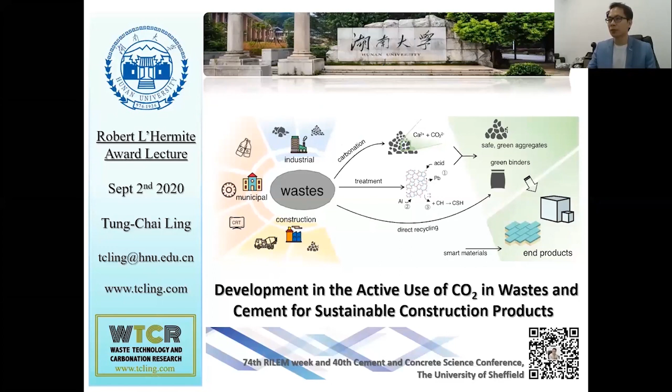This leads to today's presentation topic, on the development in the active use of CO2 in waste and cement for sustainable construction products. A little bit of background: I spent 4 years in Hong Kong and 2 years at the University of Birmingham as a lecturer. Before I joined Hunan University as a professor in 2016, I was working at the Federal Highway, US, focused on recycled glass, particularly concerning the ASR problems.

And what is the sustainability challenge that we are facing today? Concrete is by far the largest material used in the construction industry, and the demand is ever increasing and predicted to increase in the coming decades, because concrete is cheap and environmentally friendly compared to other man-made materials. Due to the huge amount of cement production, it contributes 5 to 8% of global CO2 emissions. So certainly, we have to confront this challenge now and in the future.

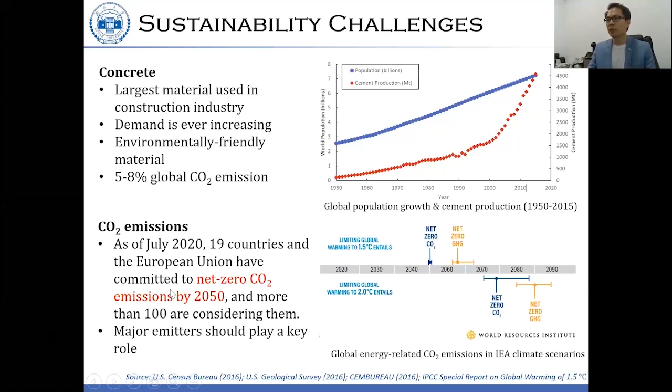In response to this, the European Union and other countries have committed to net zero CO2 emission by around the middle of the century, limiting global warming to 1.5 degrees C. The major emitters like the US, China, or the European Union should play a key role in achieving this target, or else it's very difficult to meet net zero CO2 emission by 2050, regardless of what other countries do.

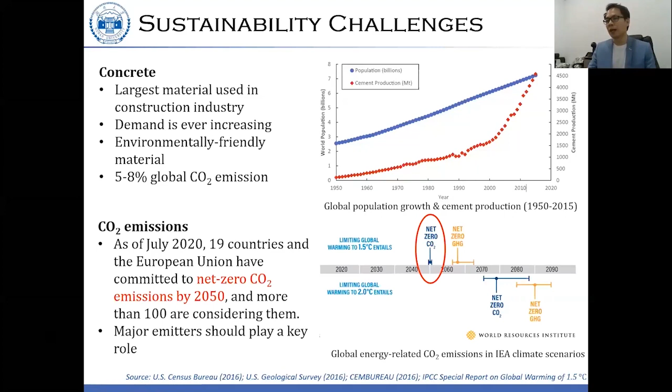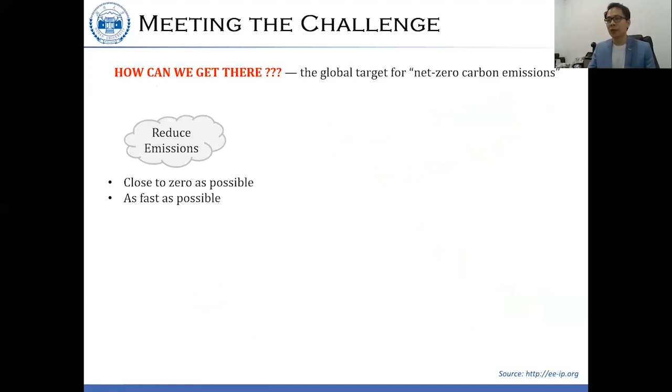So we know that we need to meet the challenge, but the question is, how can we get there? So it requires us to do two things. First is to reduce the emission as close to zero as possible, and it should happen as quickly as possible. Second is to capture the CO2 from the atmosphere as much as possible.

So I take the cement production as an example. So this is a 2050 roadmap introduced by the European Cement Association for the reduction of CO2 in the cement value chain, including the clinker, cement, concrete, construction, and recarbonation, or we call it carbon capture and utilization. So the aim is to reduce the current CO2 emission due to the production of cement down to zero by 2050.

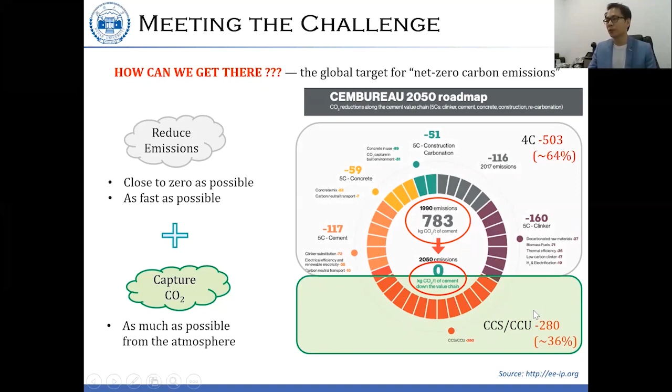So what is the potential for CCU in the construction sector, including concrete or carbonate aggregate? So from the figure, we can see that concrete still remains the biggest market size now and in the future. And also the potential in CCU for concrete is represented by the size of the bubble. In the next 10 years, they can even double the potential. However, if compared to other sectors, for instance, the carbonate aggregate, by 2030 this sector will surpass concrete in potential for CO2 mitigation.

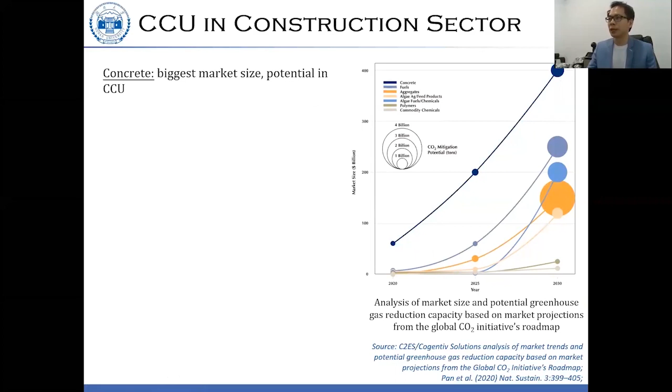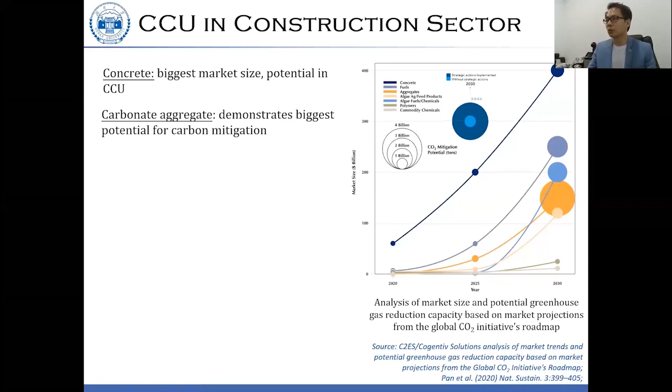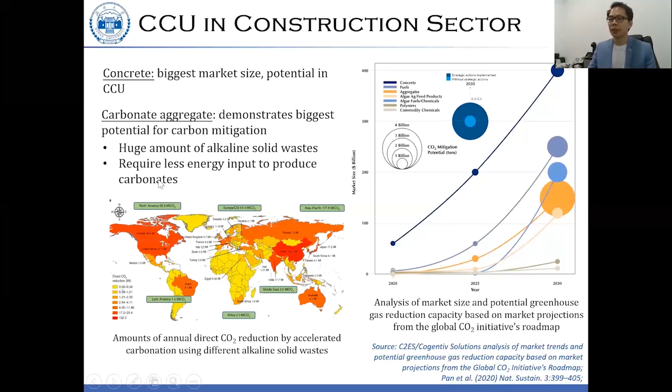So why does the carbonate aggregate show the biggest potential for carbon mitigation? So they actually predicted that if the strategic action is implemented, they have the potential to mitigate 3.6 billion tons of CO2 by 2030. So the key reason is because we have a huge amount of alkaline solid waste across different regions and countries. And this material is a very good medium for CO2 sequestration and can convert into carbonate products. And the whole process requires less energy input.

And a brief overview of what I'm going to look into today. So the role of CO2, or how CO2 can make the concrete life cycle more sustainable. So we know that CO2 is emitted from the cement plant and the amount is huge. And so we can actually utilize the CO2 for curing cement blocks or ready-mix concrete. And during the service life, depending on the type of application, CO2 can actually be reabsorbed back into the concrete, around 5 to 20%. And at the end of the service life, depending on how we recycle and handle the material, it can take out an additional 5 to 10% of CO2 from the atmosphere into this material.

So it is very important that we develop CO2 utilization technology and promote it in the construction industry so that we can make our concrete more sustainable. And apart from reducing the output of waste material, we try to consume the waste and reuse it in new concrete. And also very important is we have to find new alternative materials to conserve some of the natural resources in the construction industry.

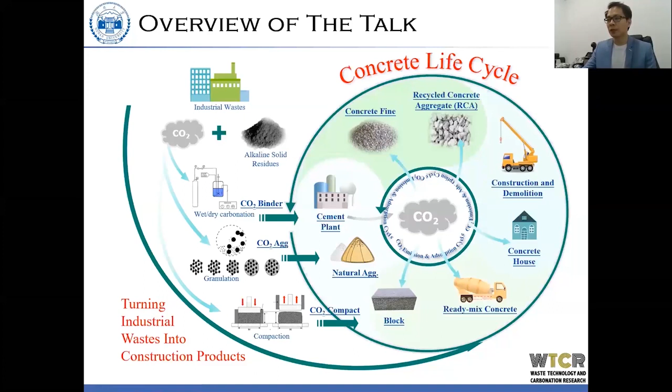So this is my focus for the presentation today: how we can turn the alkaline solid waste coming from different industries, including the mining industry, activated with CO2, into a CO2 active binder to replace some of the cement through the wet and dry carbonation process. And also we can use granulation to turn the product into pellets and use CO2 as a solidification approach to solidify and densify the microstructure. And through compaction or molding pressure, we can make different types of concrete blocks to replace conventional construction products.

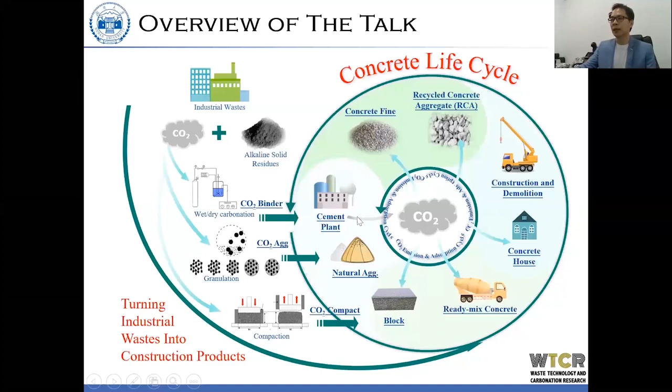So in my following slides, I will focus on these three main parts: the CO2 active binder, CO2 aggregate, and CO2 blocks. But before the end of my presentation, I will touch a bit on the technology developed by CarbonCure for ready-mix concrete, and also Solidia Technologies for a novel cement that is able to absorb a higher amount of CO2.

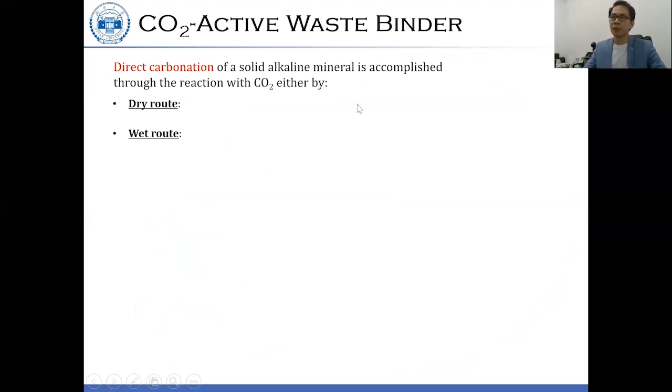So first part, the CO2 active waste binder. So in the construction industry, we know that usually we adopt the direct carbonation approach because it is less complicated and does not involve any extraction or the use of chemical reagents. And direct carbonation can be accomplished through the reaction with CO2, either by the dry route or the wet route. The dry route is more straightforward and favorable for insoluble material. However, the reaction is slightly slower. But for the wet route, they can enhance the reactivity through ion mobilization in the reactions of carbonic acid with alkaline metals.

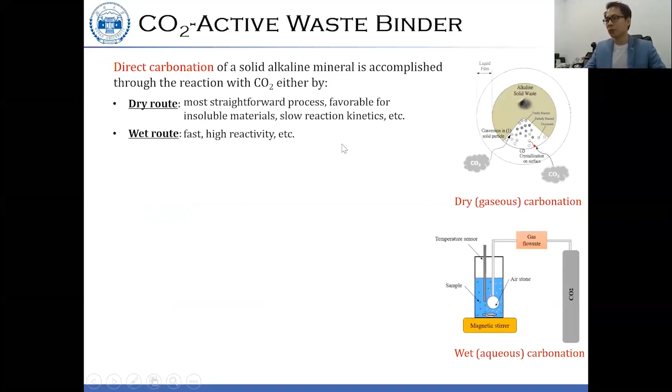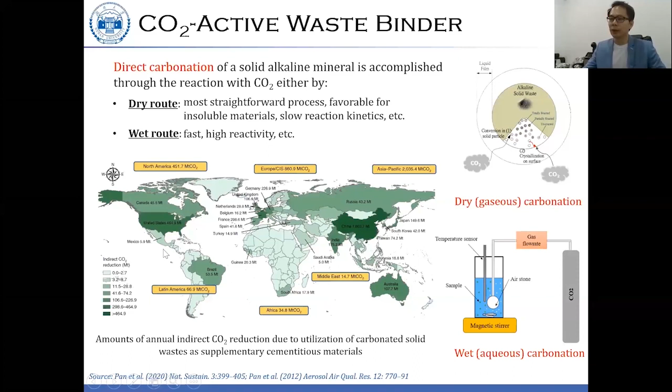In one of the recent studies, we are using concrete slurry waste, CSW, as a CO2 active binder. This waste is generated from the ready-mix concrete plant in the reclaiming process to recover some of the coarse aggregates. After the process, we're able to collect the CSW, and we dry it in our lab, and we found that it contained a certain amount of fine aggregate and unhydrated and hydrated cement particles.

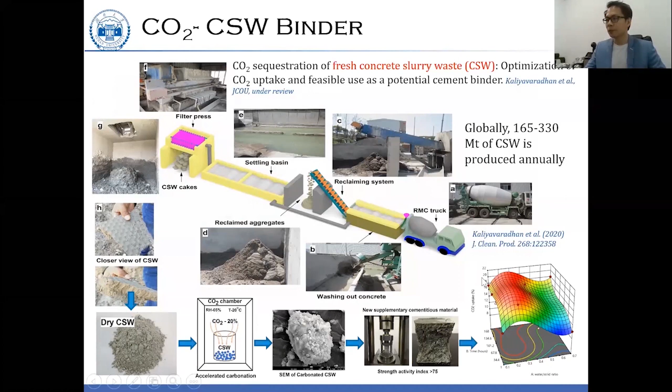So we ran it under the dry carbonation process in the CO2 chamber at RH of 65%, 20 degrees, and CO2 concentration of 20%. We carried out testing for the maximum CO2 uptake by this material, and we found there is a maximum of 20% CO2 uptake at a water to solid ratio around 0.25 at 72 hours of reaction.

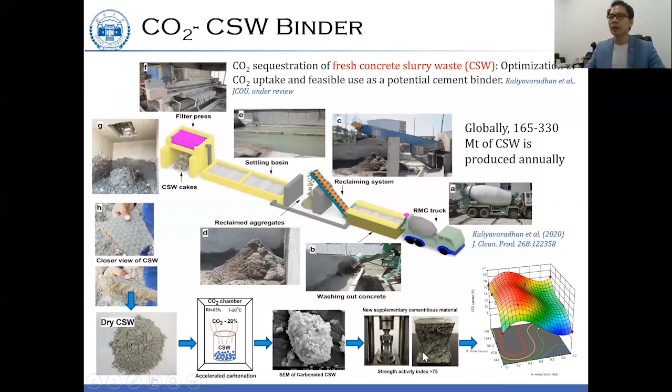So based on the strength activity index, this material could be used as a new supplementary cementitious material in cement and concrete. In another study, we use a hydrated cement powder, often called cement waste powder. It contributes to 30% of the waste concrete, and this material is actually regarded as very low value due to

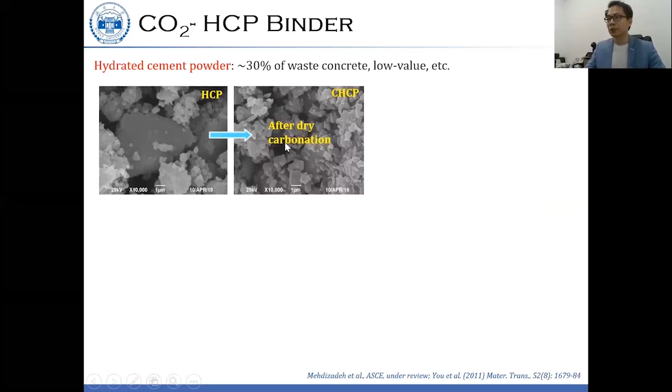the high water absorption. Through the dry carbonation process, we found the formation of calcite around the particles. This in turn significantly increases the specific surface area and also decreases the hydrated bound water. We use the carbonated HCP as a replacement for cement at 15%, and we find a comparable or slightly higher compressive strength at 28 days compared to the Portland cement sample.

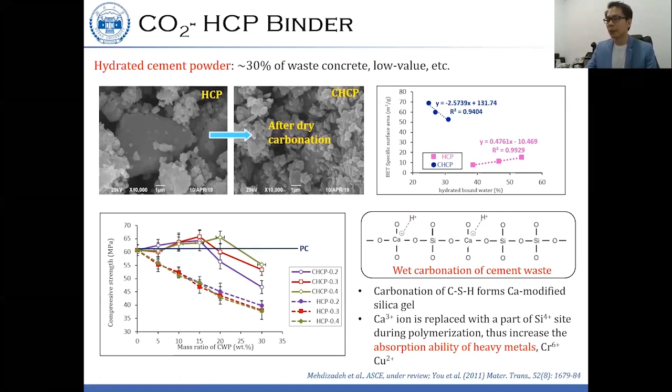A study from a Korean researcher used wet carbonation for cement waste. After the carbonation, the CSH converted to calcium-modified silica gel, in which the calcium ions are replaced with part of the silica during the polymerization. This in turn increases the capability to absorb heavy metals.

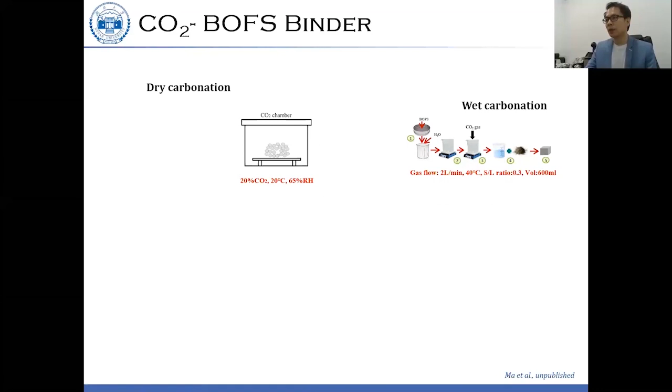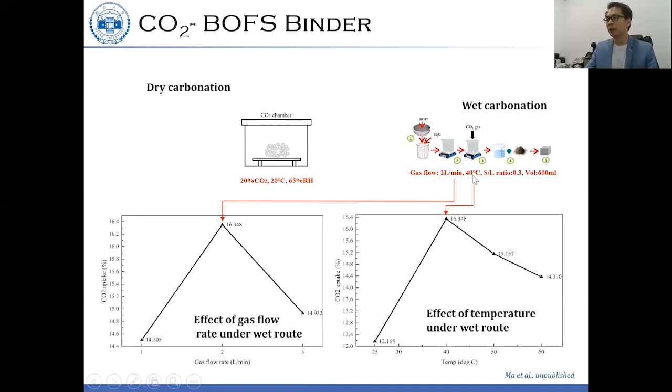We have compared dry carbonation and wet carbonation for the BOFS binder. The dry carbonation parameters are similar to what I mentioned in the previous slide. We also tested the parameters for the carbonation in terms of gas flow, temperature, and the solid to liquid ratio. We found that the optimal values are 2 liters per minute, a temperature of 40, and a solid to liquid ratio of 0.3. We measure the reactivity of the material by measuring the CO2 uptake.

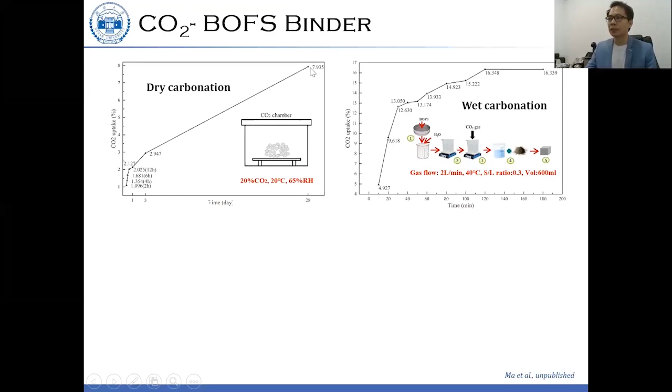As you can see from this figure, under wet carbonation at 20 minutes we can achieve 9.6% CO2 uptake, which is already more than the 7.9 recorded at 28 days under dry carbonation. Therefore, it is very important to know the nature of the material we are using and to fix the purpose of the carbonation route. If we are aiming for a higher amount of CO2 sequestration, wet carbonation could be a very good approach.

It's also very important to understand the efficiency and the rate of the reaction pathway for both dry and wet carbonation. Different conditions have different effects on different waste materials. We also have to determine the maximum limit for inclusion of this active binder in cement

or concrete. They contain some calcite or silica gel, and what important roles do those play in the cement matrix? Whether they could accelerate early hydration, or how they perform in later-age strength development. With the use of alkaline solid waste for carbonation, we are always more concerned about the leaching and absorption of heavy metals.

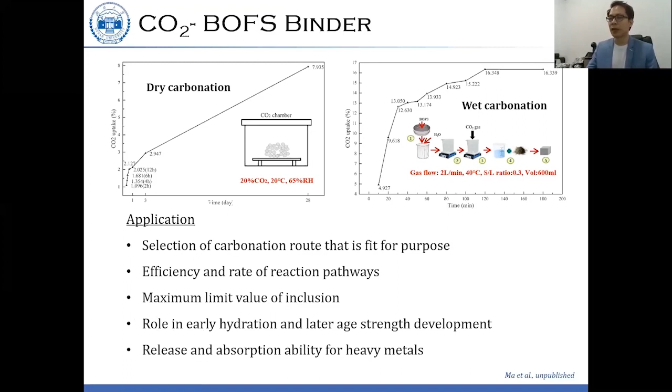So this is the second part of my presentation, CO2 granulated aggregates. Accelerated carbonation technology was already being used in 1999 to manufacture CO2 waste aggregates by Carbon8. We can turn different wastes in powder form into pellets through granulation and pelletization techniques. And through accelerated carbonation, we can activate and stabilize the heavy metals so that we can use them for different applications in construction or other sectors.

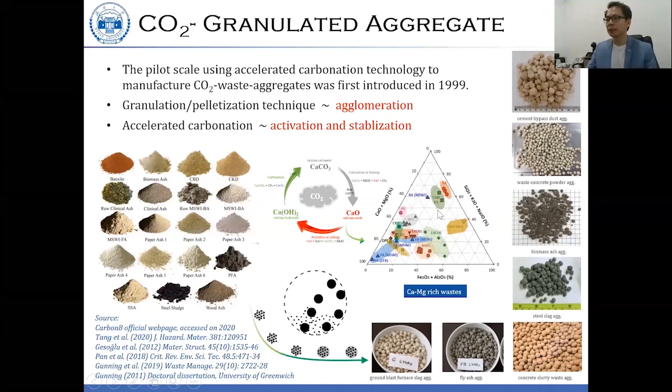So the question that arises is, when is the most appropriate time to inject the CO2, during the granulation or after the granulation? We used BOF slag as a raw material to investigate the impact of CO2 injection during and after granulation.

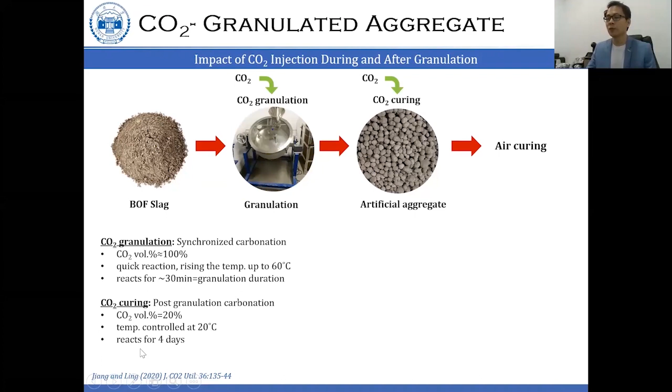So we apply CO2 during the granulation at a concentration of 100% and run the granulation for 30 minutes. After granulation, we also apply CO2 by putting the aggregate in a CO2 chamber, keeping the CO2 concentration at 20%, 20 degrees C, and exposure for 4 days. After that, we further cure under natural air until 28 days for testing.

So we have prepared 3 series of aggregates. AA refers to no carbonation, no CO2 applied during the whole process of aggregate production. AC refers to CO2 applied only after granulation. CC refers to CO2 applied during granulation and after granulation.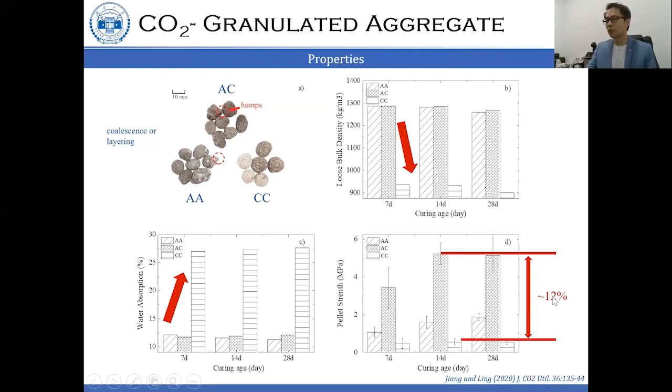However, for the CC aggregate, exposed to CO2 injection during granulation and also after granulation, we found that the strength is significantly reduced, only able to achieve 12% of the strength of AC aggregate.

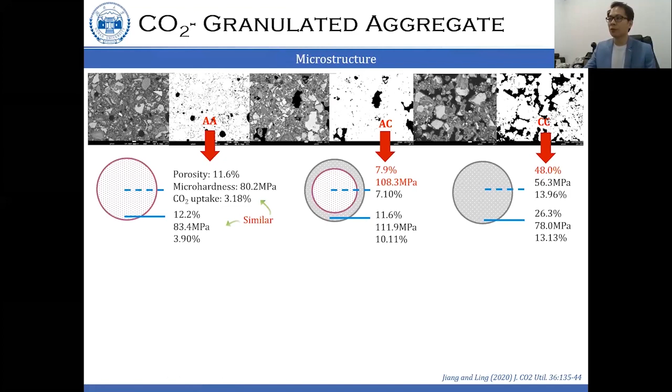So we carried out some microstructure analysis, and based on the BSE image, we can measure the micro hardness, and through image analysis we calculate the porosity and also measure the CO2 uptake. As for the AA aggregate, there is very similar core and shell layer, and the lowest porosity and highest micro hardness value was found for the core layer of AC aggregate. Surprisingly, we also found that the core layer for the CC aggregate has the highest porosity, which also explains why we have very low strength for the CC aggregate pellet.

So the key reason is that during granulation, we apply 100% concentration of CO2, and we are also using a very reactive material, BOFS, for the production process. So the aggressive carbonation reaction takes place and releases extensive heat, bridging water to create the pores. However, this situation might not be similar if we are using a low CO2 reactive material instead of BOFS slag.

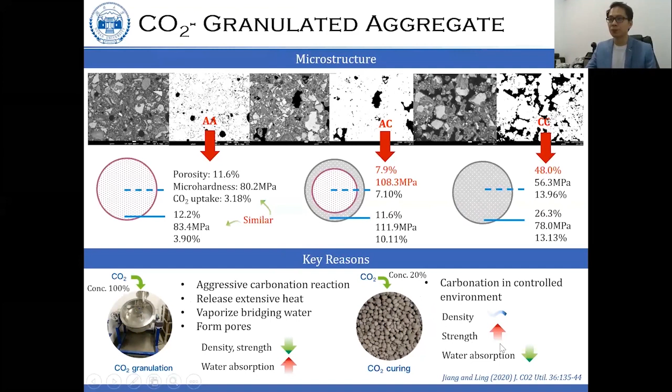And for CO2 applied after granulation, or CO2 curing, it is very beneficial for strength development, and we can reduce the water absorption. We're also using the granulation process to incorporate some smart material, for example phase change material for latent heat storage.

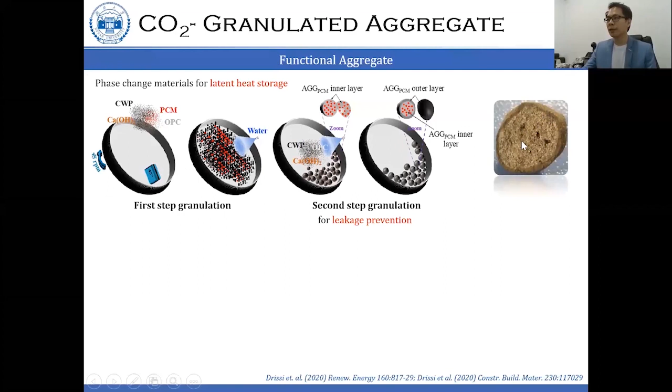So we apply PCM with other raw material during the first step of granulation. The second step of granulation, the main purpose is to make a shell layer to protect against leakage of the PCM. So we have this aggregate, and we can see they have a clear, obvious difference between the core and shell layers. We've done the leakage test, and the result is promising.

Also, we have carried out thermal properties testing by incorporating the PCM aggregate in a concrete panel and exposing it to indoor and outdoor conditions. We found that we recorded 1 degree C lower for the PCM aggregate panel, reflecting that they have better thermal performance and also potential for energy saving.

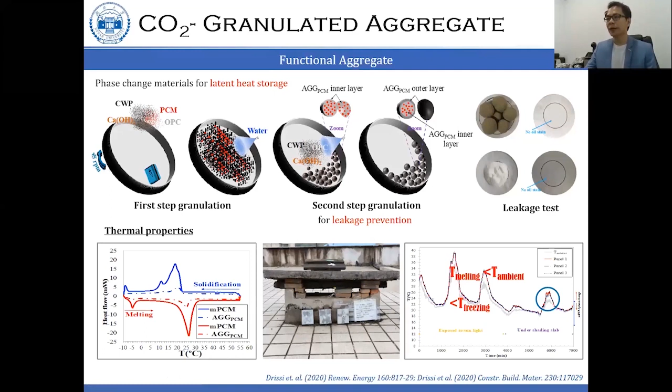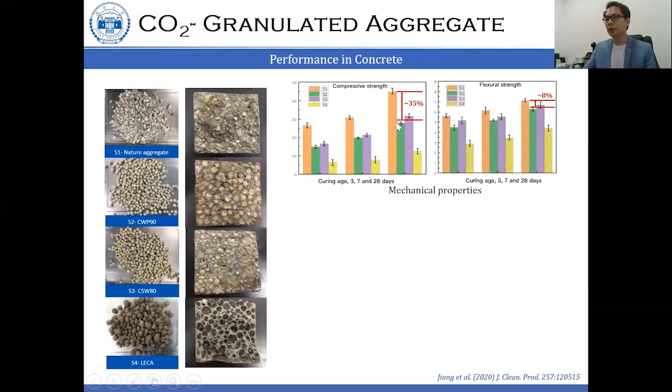We're also interested to see what the aggregate will produce when we incorporate it in concrete. So we replace 100% of the coarse aggregate, from natural aggregate and also from commercial lightweight aggregates. We can maintain the strength at 28 days at 30 megapascal. However, the commercial lightweight aggregate can only attain 10 megapascal. If you compare the compressive strength with the flexural strength, the reduction for the flexural strength is much lower.

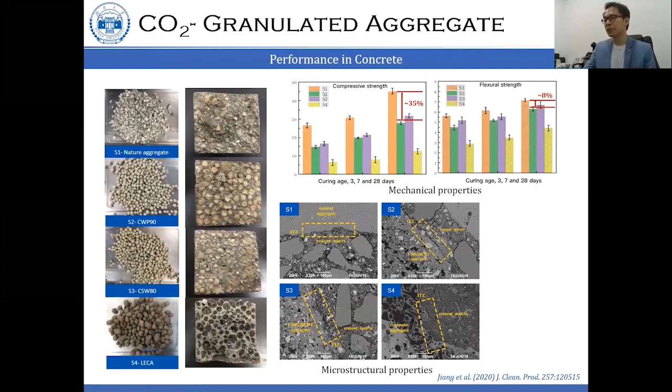We are expecting the aggregate we produce will have better bonding between the aggregate and new cement paste to compensate for the low strength of the aggregate. We can see there are 2 obvious different regions for the natural aggregate concrete. However, for the aggregate we produce, the shell layer might have some reactive material, including calcite, which could have further reaction with the new cement to improve the bonding between the layers. This is also proved by the micro hardness result.

So a bit about the applications. The process is relatively easy, simple, and technically feasible as compared to CO2 active binders. We can also design different properties, make the aggregate lighter, and give it functional properties.

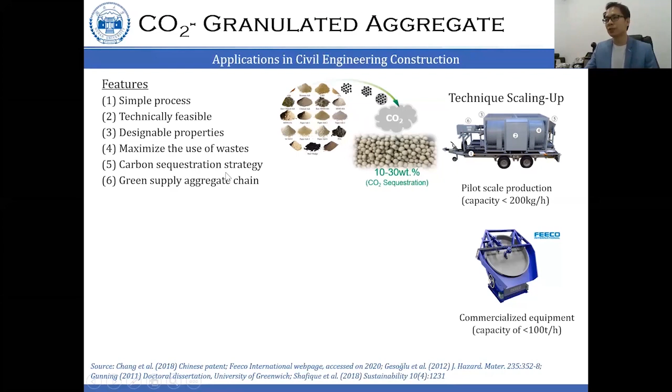We can incorporate PCM, and the process can maximize the use of waste. This is a very good approach to apply in different countries, because different countries and regions might have different waste materials. So we can consume a lot of waste material and use it as a medium to absorb CO2. This could be a very promising approach for carbon sequestration strategy, and we can also establish a green supply chain for the construction industry.

And the part of my presentation is the CO2 block. So CO2 curing actually has been researched since 1960, so certainly this is not a new technology.

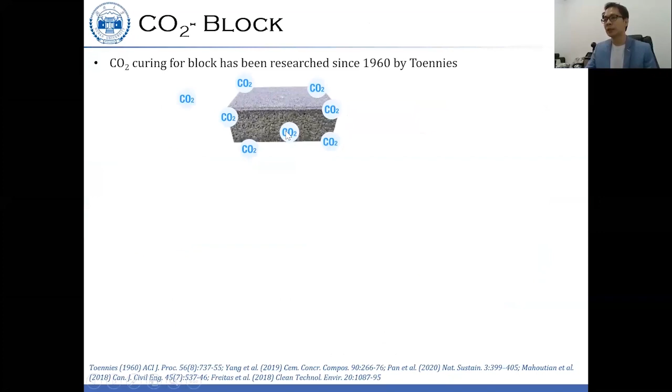And it's very interesting, the block has a very high potential for carbon sink. Why? First, we know that concrete block is prepared with relatively low water to cement ratio, so that we can compact and have instant demolding feature, and at the same time we have a higher porous structure.

And during this situation, we still are able to provide sufficient moisture. With instant demolding, we have a fresh mix for concrete or alkaline solid waste material. Before hardening, we have an open pore structure, which has high permeability for CO2 gas diffusion. So this could be almost the ideal condition for CO2 reactions.

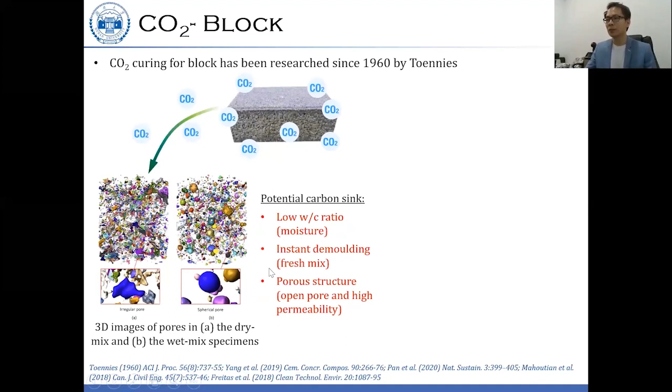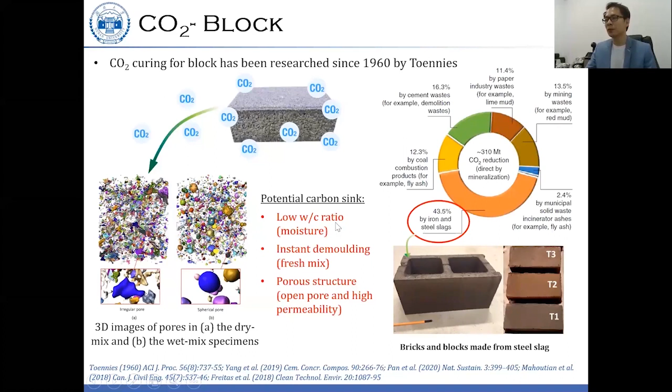And we also can incorporate different kinds of CO2 active material, for instance steel slag as the binder, to make the concrete block with very high strength.

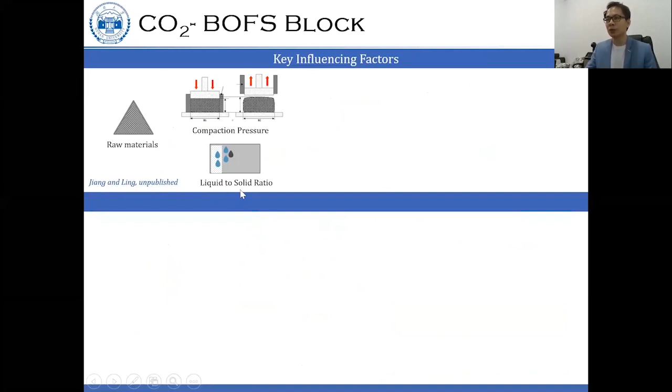And we know that a part of the raw material, the key influencing parameter affecting the performance of the concrete block, is the compaction or molding pressure or the liquid to solid ratio, because the compaction will influence the packing density and availability of the pore for carbonation.

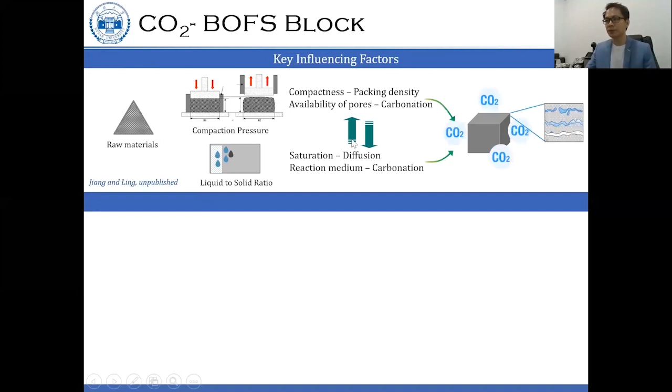So the liquid saturation also influences the diffusion of the CO2 for the carbonation. In our study, we studied the different parameters: liquid to solid ratio, the molding pressure, and also the carbonation duration.

From this figure, as we can see, if we decrease the water to solid ratio and decrease the compaction or molding pressure, we in turn increase the initial air void - 13, 19, 26, represented by the dotted line. And this will also help for the CO2 diffusion.

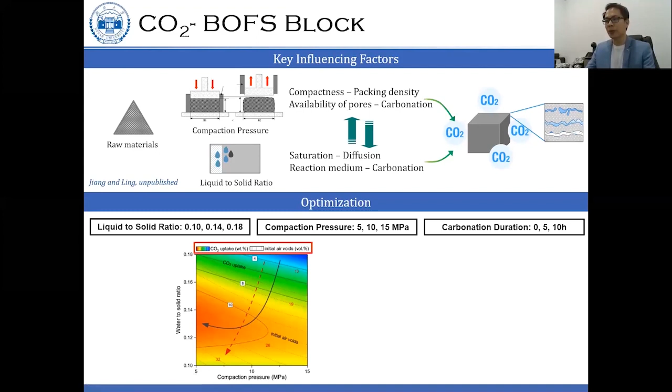However, at very low water content, it could limit the CO2 reactions. So the best water to solid ratio is around 0.13.

And it doesn't necessarily follow that the highest CO2 uptake will have the highest compressive strength. We can see the compressive strength achieved at the highest molding pressure, but also somewhere around 0.125 or 0.13 water to solid ratio. As we can see at this region, we also could have quite high CO2 reactions or CO2 uptake.

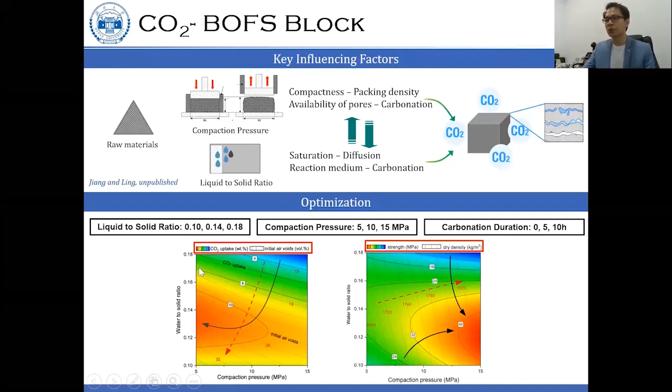So preconditioning is a very important parameter that we have to consider, whether we need to remove some of the excessive water before we run the CO2 curing. We selected 4 different samples with different water to solid ratio - this is preconditioning, this is non-preconditioning. We preconditioned for 2 hours at 20 degrees C with RH of 50%.

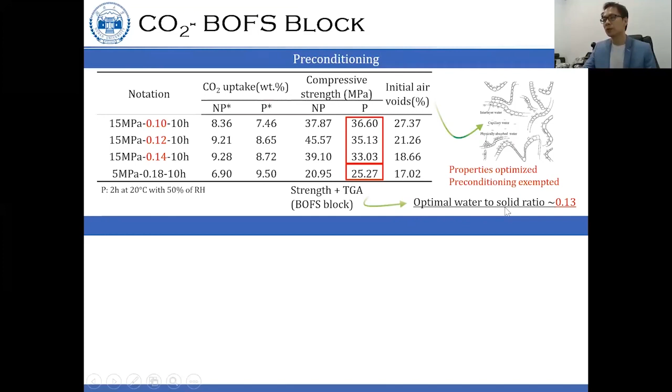We found that after preconditioning, for the low water to solid ratio, that decreases the reactivity, CO2 uptake, as well as the strength. However, for the high water to solid ratio, the preconditioning actually could help to increase 20% of the strength. So we can conclude that if we have an optimum water to solid ratio, we can exempt the preconditioning.

We also did some reaction kinetics through the shrinking core model, and we calculated the effective CO2 diffusion rate. For the lowest molding pressure and lowest water to solid ratio, we found the diffusion rate is 8.16. If you compare to the high molding pressure and high water to solid ratio, it is almost 30 times lower than this sample.

We're also using QXRD to quantify the phases, and we will see the evolution with different CO2 uptake. Sample 1 refers to the lowest CO2 reactivity, sample 5 refers to the highest CO2 reactivity. As we can see, there is a reduction of portlandite and brucite if we increase the CO2 reactivity. And with increased CO2 reactivity, we also found that the calcite, magnesian, and amorphous phases have increased.

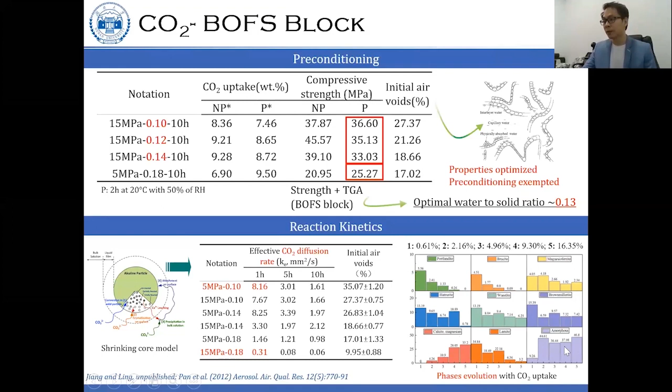As for the CO2 cement block, we also investigated the compaction pressure and water to solid ratio, and this is also without preconditioning. We tested the effect of 2-hour early carbonation for different samples.

2-hour carbonation is referred to in the first column. We can see there is no effect under the low molding pressure if we are changing the water to solid ratio. However, as for the high molding pressure, if we increase the water to solid ratio, there is a decreasing trend for the strength, especially when we achieve the high water to solid ratio of 0.175.

At this situation, we could have liquid blocking the CO2 diffusion. However, if we further cure with water until 1 and 7 days, we see there is no significant difference for the different water-to-solid ratios. But as we increase the molding pressure and increase the water-to-solid ratio, we increase the compressive strength of the sample.

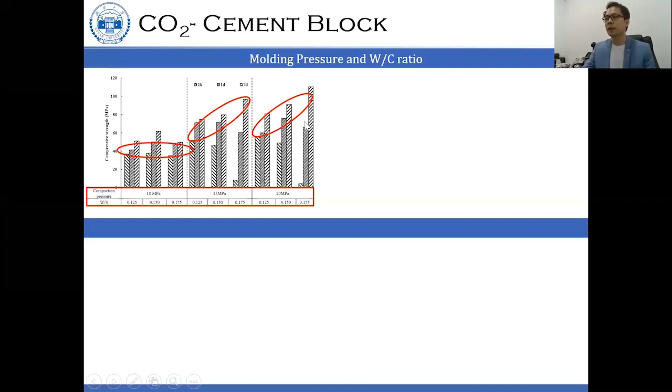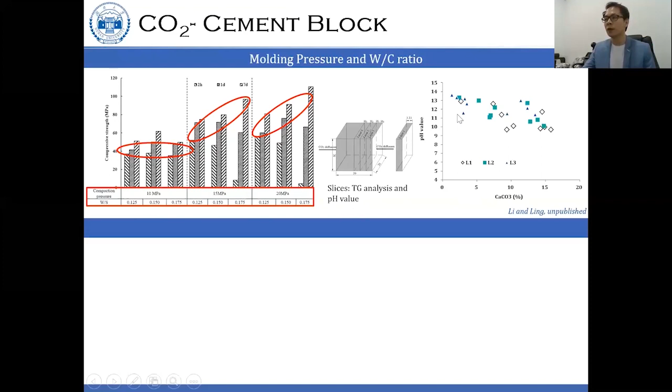We also tested different layers using TG to calculate the calcite content and to measure the pH value, and we found there is a good correlation. And for the CO2 concentration, as we increase it, based on the result we found that...

It could help for the cement hydration and also for the CO2 reactions.

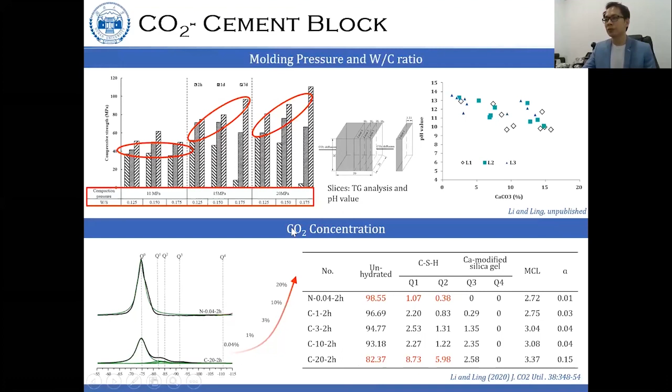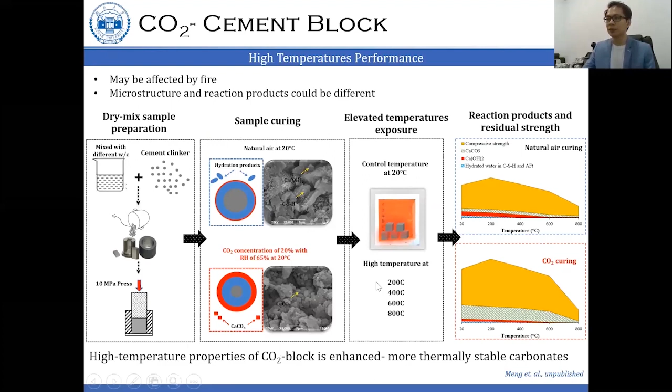For the applications, this is also technically feasible and low barrier because we can easily set up the curing chamber in a conventional cement concrete plant. We have no concern for steel corrosion, and we have fewer performance standard requirements as compared to structural material.

Interestingly, based on the literature, we found there is a wide range of percentages for CO2 sequestration for different types of block. Different types of block - solid block, hollow block, size effect, different material, different compactness, different liquid-to-solid ratio - will really affect the amount of CO2 sequestration.

And also for the future, we have to find a more economical and environmentally friendly CO2 source, maybe sourced directly from the flue gas or the landfill gas.

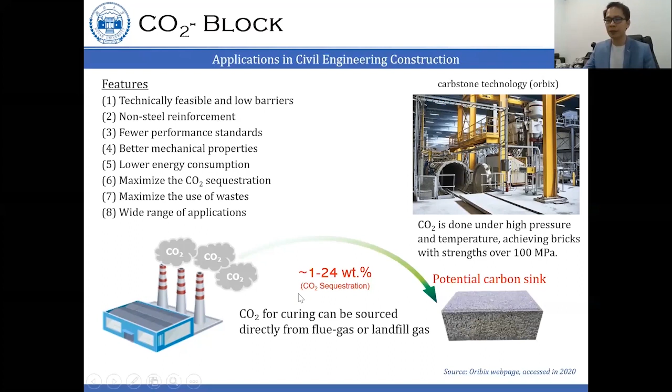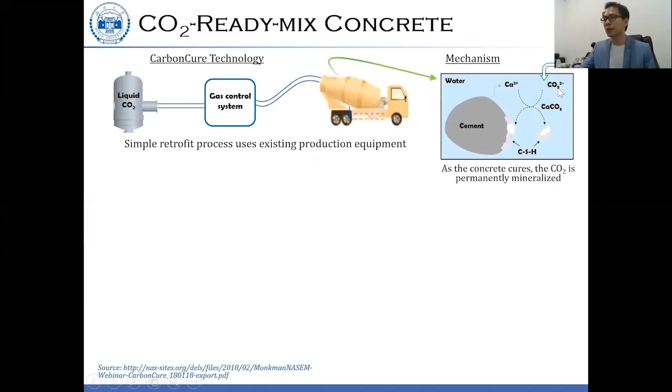One slide for the CO2 ready-mix concrete. This technology has been developed by CarbonCure technology, a simple retrofit process that can use existing production equipment. CO2 is injected into the concrete truck, and once the cement mixes with water, it can dissolve and release the calcium ion to react with CO2 to form nano calcite.

And we found that they can use 5% less cement under the CO2 curing. It could also provide 12% higher strength than the control sample. They mentioned durability is generally unchanged, however the workability is a little bit less than conventional concrete.

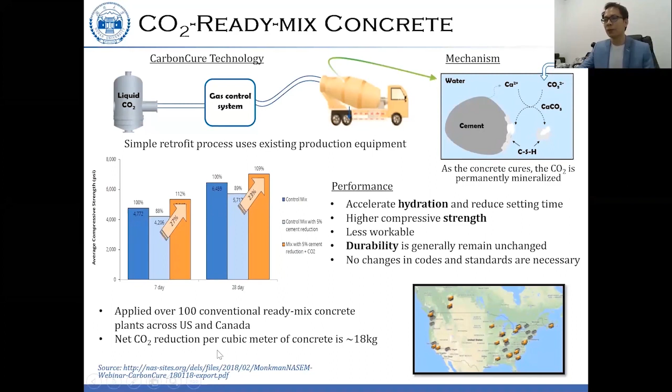The plant has already been applied over 100 conventional ready-mix concrete plants across the US and Canada, so they can reduce 18 kg of CO2 for 1 ton or cubic meter of concrete using this technology.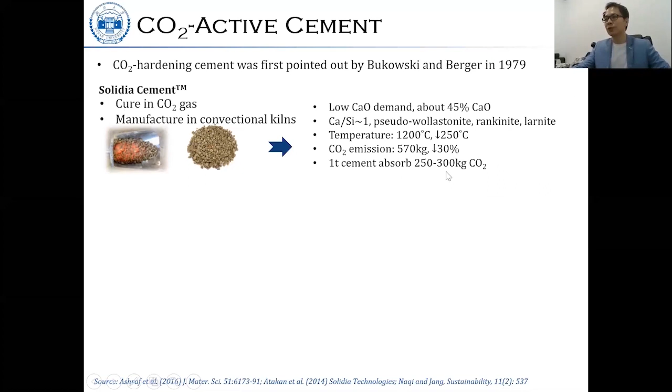They use CO2 to cure the cement instead of water for hydration, so they're able to absorb 250 to 300 kg of CO2 per 1 ton of cement. After carbonation, they form calcite and silica gel to build up the pore, and the microstructure looks denser than conventional concrete. The strength at 24 hours is comparable to 28 days of conventional concrete.

The major concern is the low pH value - lower than 10, so there is a potential risk of corrosion. As I know, they already work on this together with the Lafarge cement company to really make this application wider and solve these different challenges.

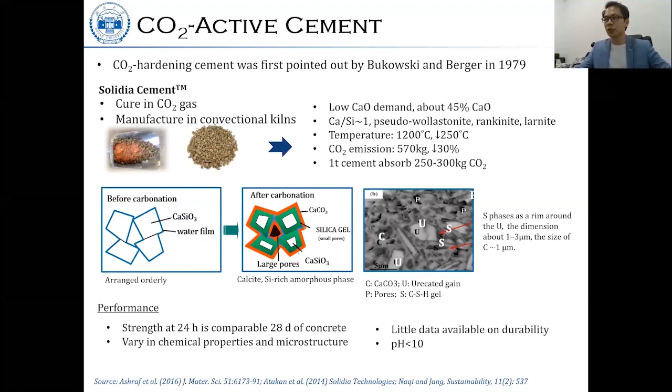To summarize, the key focus for the concrete life cycle to meet net zero CO2 emissions: I think we have to pay more attention to the recarbonation or utilization of CO2 during the life cycle. We have to find a more economical source for CO2, do more tests to ensure durability performance, and apart from the output of waste, we need to make the concrete life cycle more sustainable and find more alternative input materials.

So there is a huge opportunity because we have a huge amount of alkaline residue from different industries. The technology, as I mentioned in the previous slide, is relatively low compared to other sectors, especially the technology for the granulation and the compaction. But we still have challenges in the economic aspect and safety, because they have a competitive price in the construction market, and we have to find a more simple process.

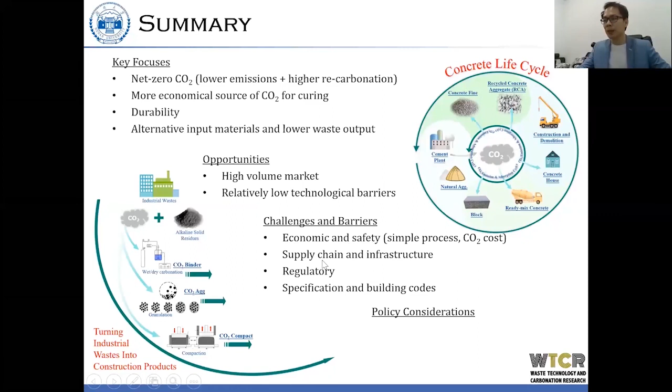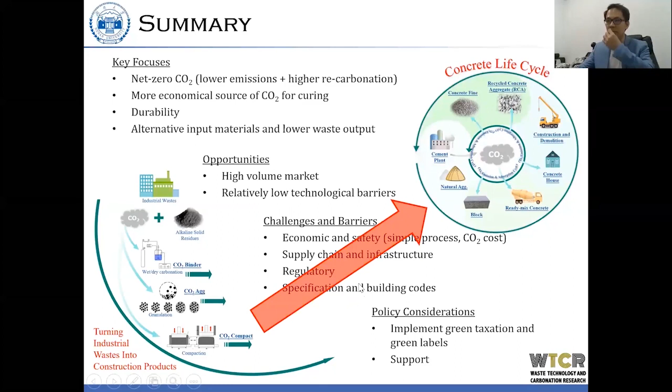There is also a concern about heavy metals because of the different kinds of alkaline solid waste. More importantly, the supply chain is so important because we need to ensure the quality and quantity for the production. And of course, the regulatory specifications: we need to work actively with policymakers and industry so that we can mitigate the challenges, especially for specifications and regulation. And we need to get support from different industries.